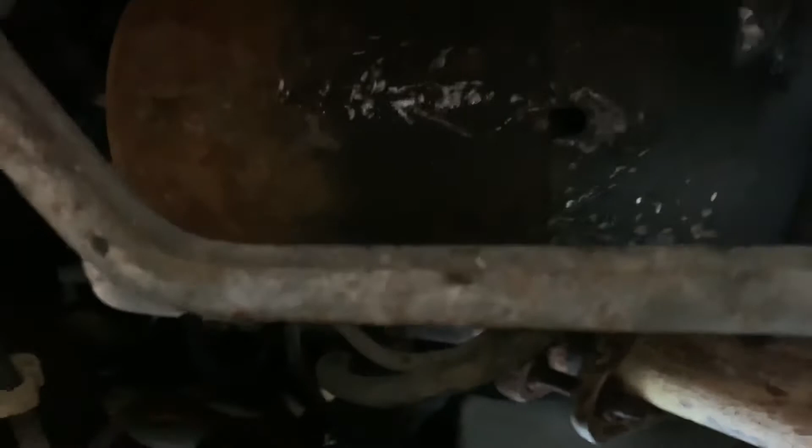So there's the starter. It's pretty simple, looks like just 2 bolts. Pretty easy, pretty standard. So I'll go ahead and get it off. It's kind of tight, so I can't really record and do this at the same time, but I'll get back to you when it's off.

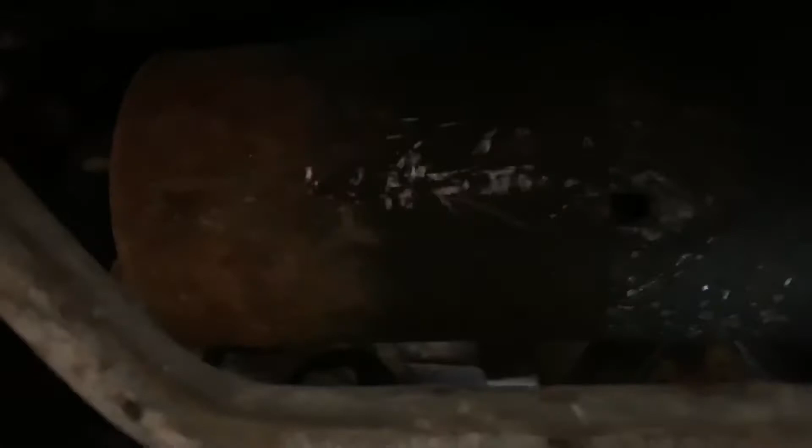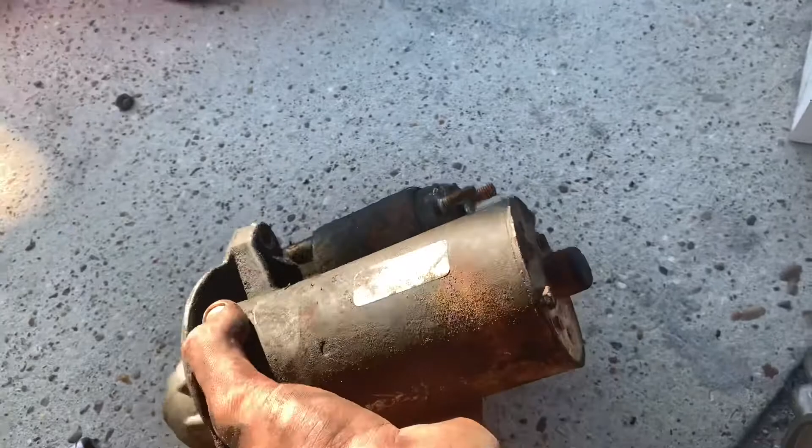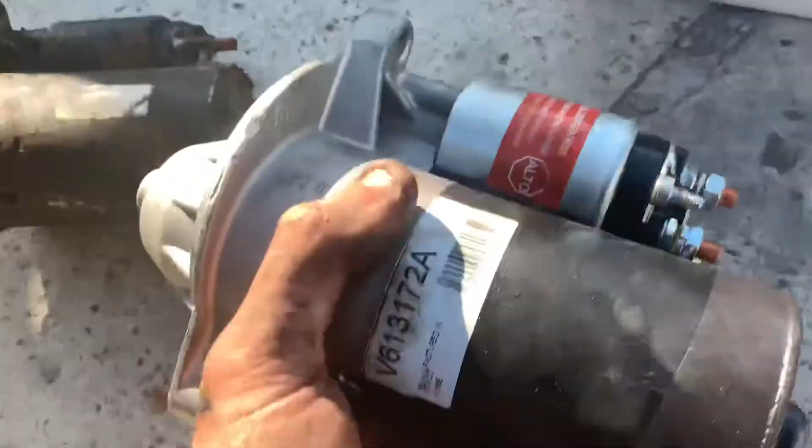So there's the old starter, definitely not looking too hot. Replacing it, here's the new one. Looks pretty much brand new, got the 1-year warranty on it. Hopefully this allows the truck to start so we can drive it home. That would be nice. All right, I'm gonna install this new guy.

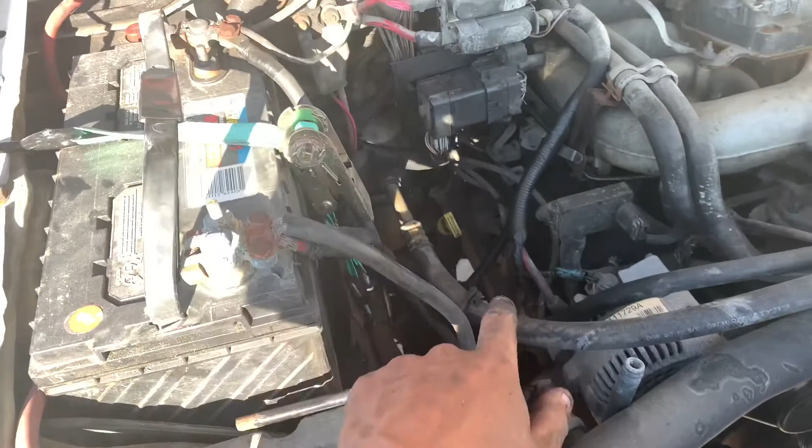All right, something I forgot to mention, whenever you're replacing your starter or doing wiring stuff, you're gonna want to disconnect the negative on your battery. So I just reconnected it because I just put in the starter.

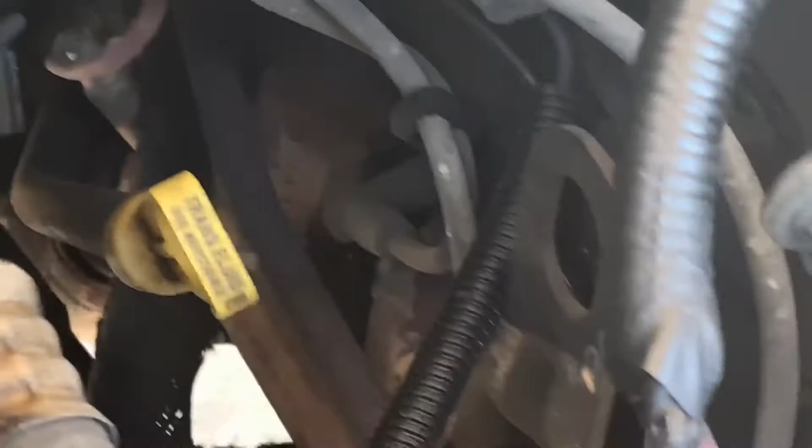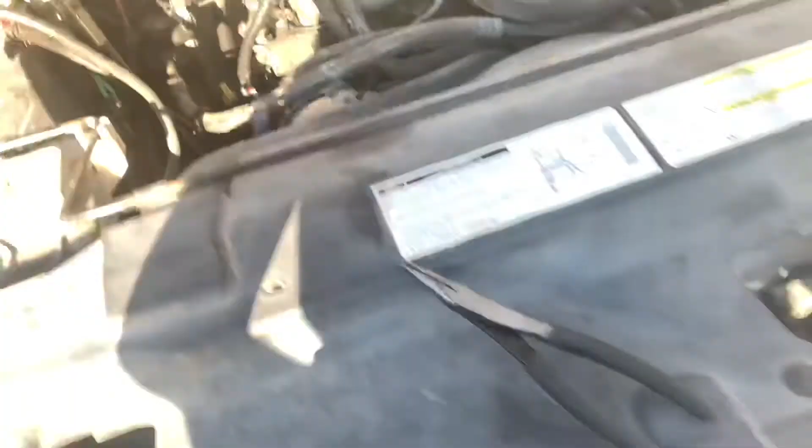Yeah, right there, you see where that red tape is? That's the starter right there, underneath the manifold. This is the 4.2 liter F-150, so it's the V6. Here we go, we're about to do its first attempt to start up.

So before, when you would try to start it, it would just click, it wouldn't start at all. Let's see what we got now. Yeah! She started right up. Awesome.

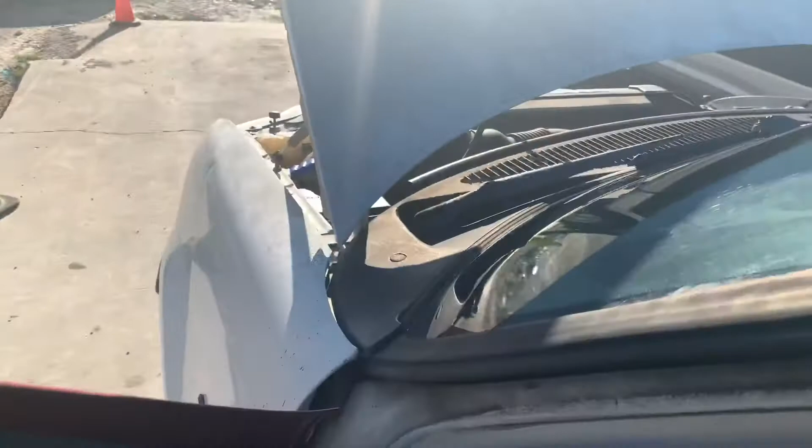All right, so in my video I realized I forgot to explain what each thing on the starter did, so I'm gonna draw it out real quick. I'm gonna draw the main body of the starter first. I'm not an artist, so you'll just have to work with me. Anyways, there's the main body.

Here's the solenoid that comes off of it. On the solenoid there are 3 studs, and one of the studs connects directly to the main body via some wires, so don't worry about that one at all. One of the other studs will have a lead on it already from the starter. The lead says do not remove it, but I removed mine because my truck already had one that connected directly to it.

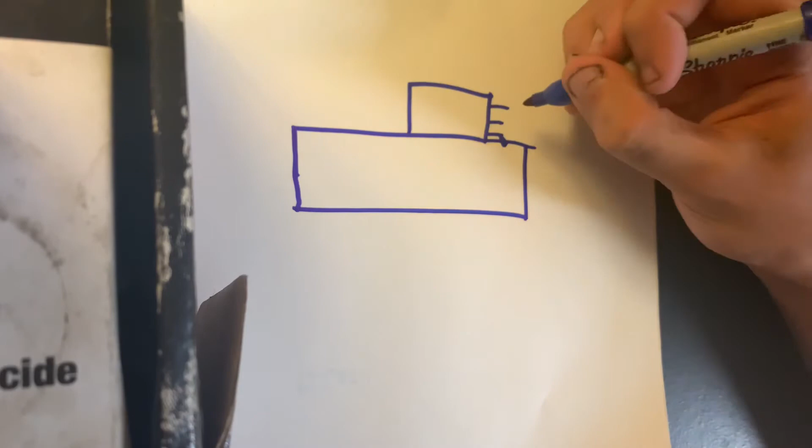So yeah, like I said, I removed mine. I also forgot to draw the mounting point here, so those are the bolt holes that will go through the transmission. But we'll start with the solenoid first.

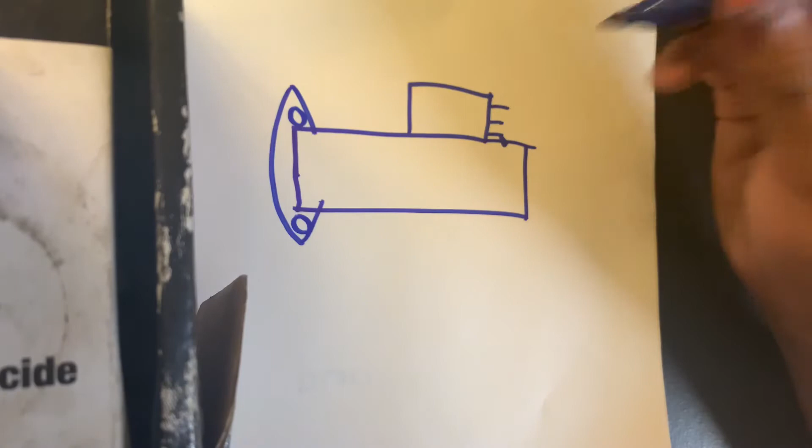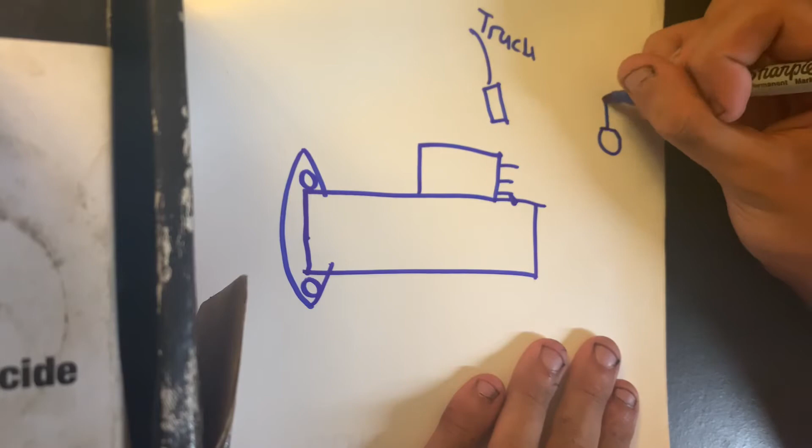So in your truck there will be a harness. This is the harness, truck. Now this harness will separate into a couple wires. One wire, which you'll see will have a washer, well, not a washer, but its connection point will look like this. It will have that little piece on it going downward, toward, like, inward. I don't know how to draw that.

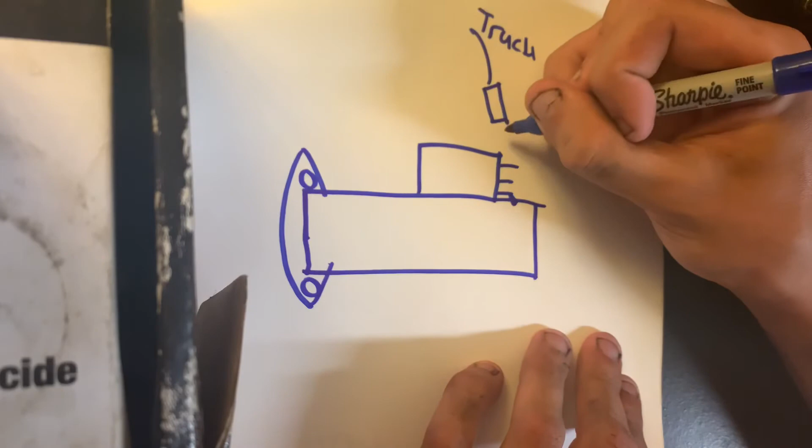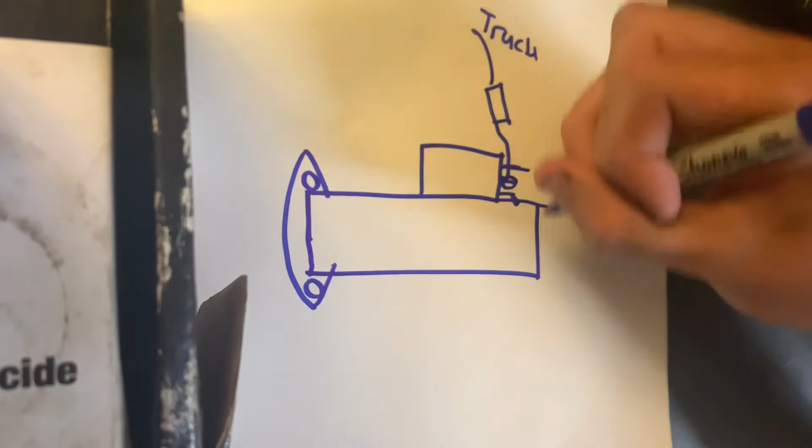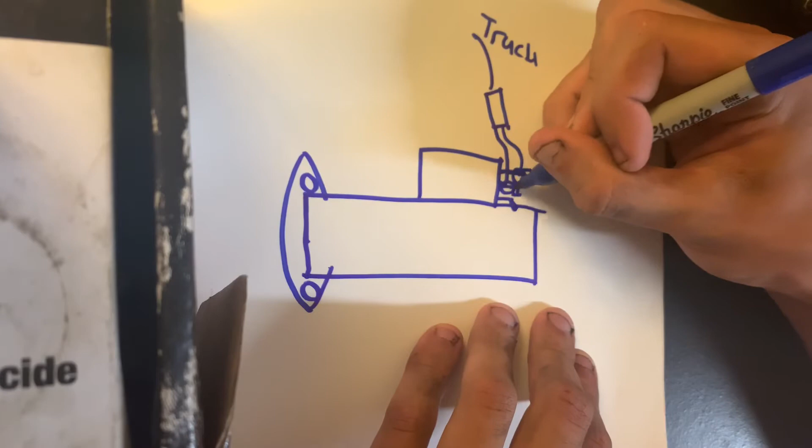That wire, you're going to connect to the smaller piece, or the one where the lead was. This is where the lead from the starter came out of. You'll have another wire that will connect to here, and you'll put your nut on. Also, the lead one had a nut with a crush washer attached to it. That will go in and in.

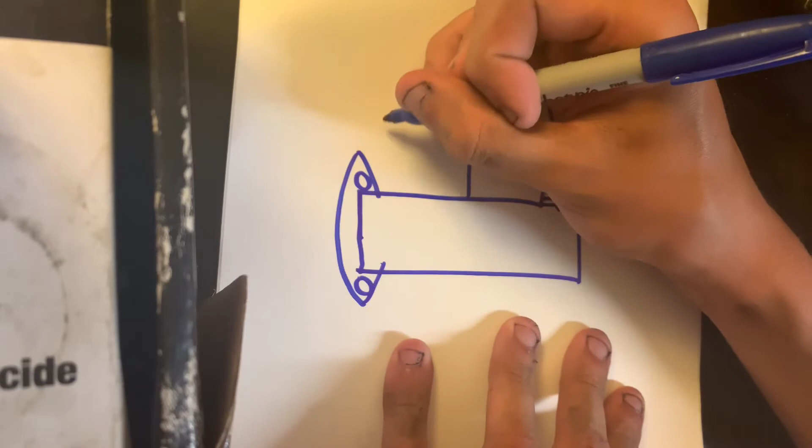As for these bits here, so this is the top, this is the bottom. The bottom was just one simple bolt. Boom, so there's the bottom end. The top, however, was...

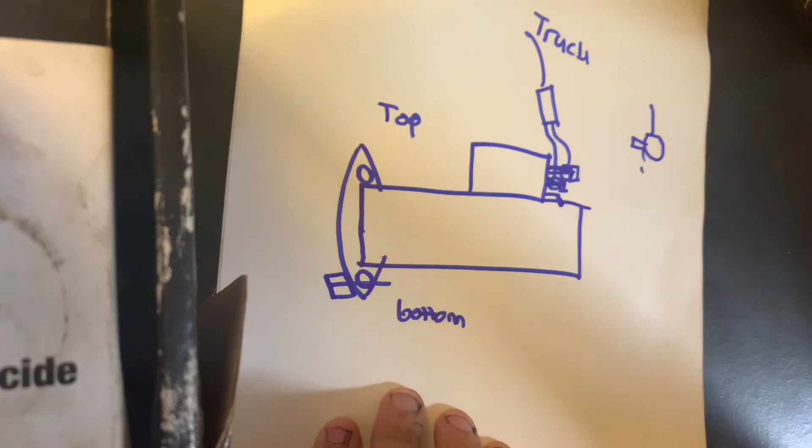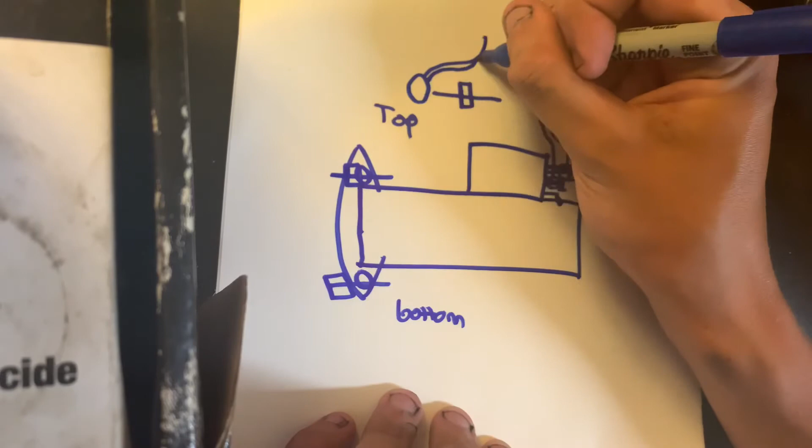It was a bolt like this with the bolt in the center, and what that does is you run it through and the bolt will be right here, snug up against this. Then from the truck you'll have another wire, a really big, thick wire, I believe that's just your ground, and that wire will connect in over here after you throw in the stud, and then you'll have another nut, and you'll put that nut in over this wire to get a good connection between those.

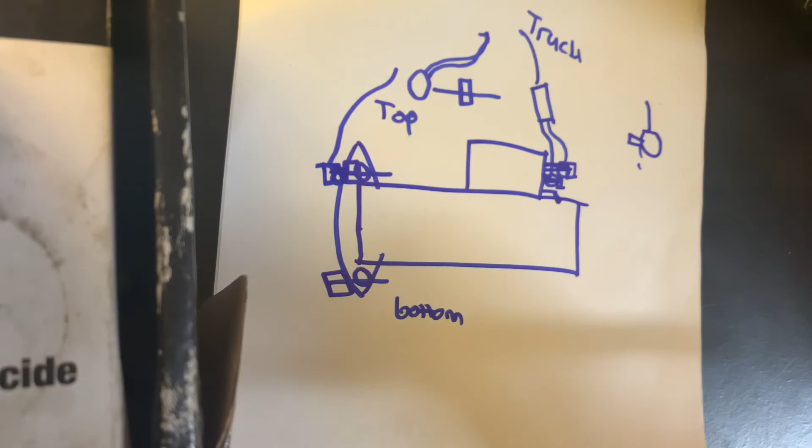And well, it's as simple as that, there's nothing much to it. This side here is your transmission. Well, okay, I did that wrong, these bolts are supposed to be going in this way. My bad, but yeah, that's the idea.

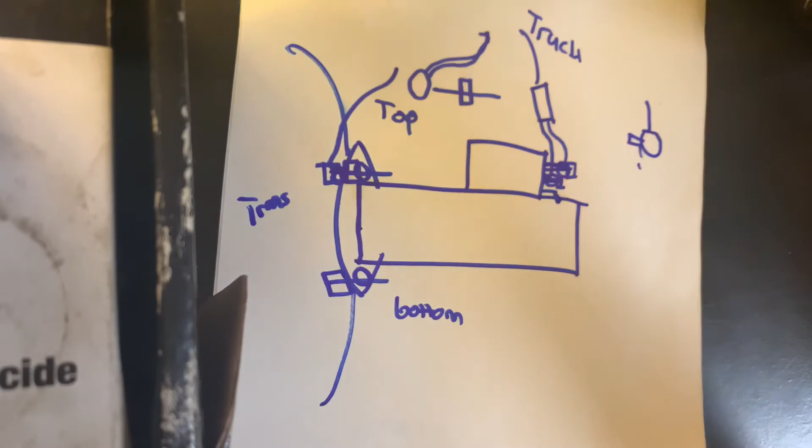It's pretty simple, there wasn't much to it. The wiring was straightforward, everything, you could tell where it went based off of what was already there. You just remember it, take a picture of it before you take it out, or as you're taking it out. Because when I removed my starter, I actually undid these two first, pulled the wire out, and then I tilted this guy downward towards me, and then I undid these two.

So it was pretty easy, pretty simple process. The hardest part is maneuvering it around some hardline cables, but you're able to just grab them and pull them away from the starter, and then you could tilt this 90 degrees. So you'll tilt it on the X, so the whole thing is facing this way, and then you'll bring it straight down while pulling these outward.

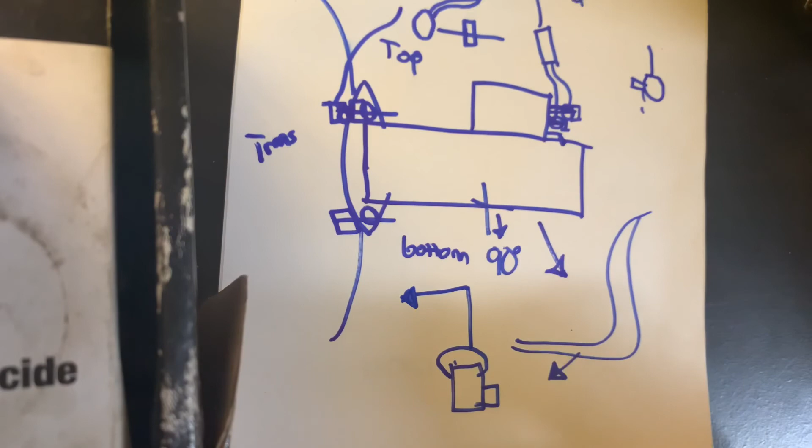It's pretty easy, and then to get it in it's the same process, you'll just do it in reverse. So the starter will be like so, and then you'll go up and then over like that. So it's pretty simple, I thought I'd just give you all a quick diagram, and yep, there you go. That's a detailed look of how to remove your starter and put in a new one.